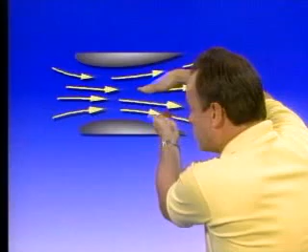And what he learned is if you measure the air pressure as the air goes through the tube, when the air gets to the narrow part, it has to go faster to get through that tube. And at points where the air is going faster through this tube, the pressure is the least. So the points where the air is going the fastest, the pressure is the least. And you might look at this, and it looks like we have two wings here, and we do. So let's take one wing away, and you have the same effect.

You have a wing, and air is forced to go over the top of the wing, and that air speeds up. Now you might say, wait a minute, why doesn't that just compress instead of speeding up? Well, the fact is that free air will not compress. If you could trap it in a gallon jug, you can compress air, but free air won't compress, it just moves out of the way. So this air that gets forced to go over the top of the wing moves faster, and Bernoulli's law says that there is therefore lower pressure at the top of the wing.

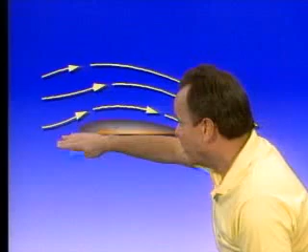And you can measure it with a gauge, measure it any way you want, and there is low pressure on top of the wing, relative high pressure underneath the wing, and that's the pressure differential that creates lift. Now the FAA wants you to know that an aircraft wing is designed to produce lift resulting from, and I'm giving you magic words from the FAA written exam, relative positive air pressure underneath the wing or below the wing surface and negative air pressure over the top of the wing surface, and that's what creates lift, and that's Bernoulli's principle.

Now, let's get a couple other terms out of the way, and one of these terms we want to talk about is angle of attack. And let's start off by drawing a line from the trailing edge of the wing to the leading edge of the wing. If you draw a line from the trailing edge of the wing to the leading edge of the wing, that line is a chord line, and it roughly points the direction the wing is pointed, like so. Now, if the airplane wing is going this direction, the relative wind will be coming from the opposite direction.

And that angle between the chord line of the wing and the relative wind, that angle is called the angle of attack. And the FAA wants you to know the angle of attack of the wing directly controls the distribution of the positive and negative pressure acting on the wing. And when you increase the angle of attack, you increase lift and you also increase drag. So by changing the angle of attack of a wing, you can, as a pilot, control the airplane's lift, airspeed, and drag.

And as you increase this angle of attack, the lift gets greater, you have lower pressure on top of the wing, and higher pressure underneath the wing, and more lift, but at the same time, you have more and more drag as you increase the angle of attack of the wing. So it's by controlling the angle of attack, you can control lift, airspeed, and drag. Now, an increase in angle of attack will increase impact pressure below the wing, and it will also, as a result, increase drag.

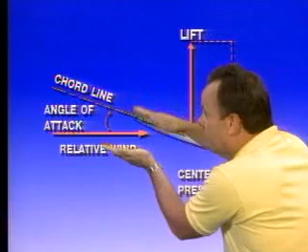Now, to maintain altitude while your airspeed is being decreased, what would you have to do then? Increase or decrease the angle of attack? Well, if you slow this airplane down and you want to maintain altitude, you're going to have to increase the angle of attack to generate more lift. They call that coefficient of lift: increase the lift for a given speed.

So as you slow the airplane down, you have to increase the angle of attack to compensate for the decreasing lift. Now, let's assume you want to transition from straight and level flight to a climb. What do you do? Well, you momentarily increase the angle of attack, and lift will be momentarily increased at the same time as you increase that angle of attack.

Now, as altitude gets higher, the air gets thinner. That thin air affects your pitot tube in exactly the same way it affects the wings. So the airplane will stall and fly at the same indicated airspeed at high altitude as it would at low altitude. But what is your true airspeed over the ground going to be when you're in thinner air? The answer is you're going to actually be going at a faster true airspeed for a given particular angle of attack.

So to generate the same amount of lift as altitude is increased, and I'm giving you the answers for an exact FAA written exam question, an airplane must be flown at a higher true airspeed for any given angle of attack as you go to higher altitude. And that's because to get the same indicated airspeed, you have a higher true airspeed.

Now, when an airplane is flying, the air is flowing smoothly over the surface of the wing and conforming to the surface of the wing. And that's, of course, what creates lift. And as you increase the angle of attack, then you have more lift and you have more drag. You keep increasing the angle of attack, you can get more and more lift until finally you increase the angle of attack to the point where the air can no longer conform to the surface of the wing. And it'll begin to backfill and burble and eddy. And where that is happening, lift is destroyed.

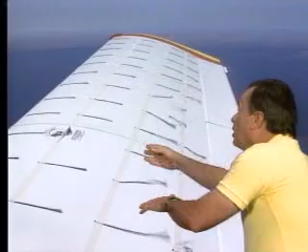And as you increase the angle of attack further, more and more of the wing begins to stall, and lift will be destroyed. And finally, when you reach a critical angle of attack, nearly the entire wing has lost its lift, and that's called the critical angle of attack. And it has to do with the relationship between the chord line of the wing and the relative wind. And that causes the air to flow backwards and backfill and burble like that.

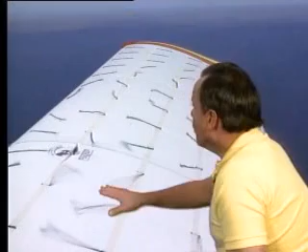Now, the FAA is going to ask you, when does an airplane stall? And the answer is an airplane stalls when you reach the critical angle of attack. And the question is, does the critical angle of attack change? And the answer is no. For any given wing shape, the critical angle of attack remains constant regardless of anything else that's going on. So no matter what they put in this list, the critical angle of attack remains constant because an airplane stalls at a specific angle of attack.

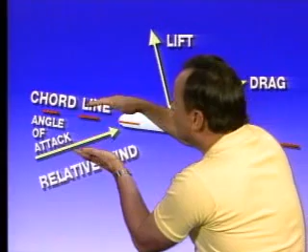So it remains constant regardless of weight, dynamic pressure, that's the air forcing itself over the wing, bank angle, pitch attitude, attitude with relation to the horizon. They could put anything in this list, and the answer is the angle of attack at which an airplane's wing stalls remains constant regardless of anything you might put in that list, because an airplane stalls at the same critical angle of attack at all times. So you can see that this angle of attack, especially the critical angle of attack for a particular wing, rules everything. And then the airplane stalls at a specific critical angle of attack.

Now let me ask you a question. If you have an airplane, we'll say, illegally over gross weight, would that airplane stall at a higher indicated airspeed or lower indicated airspeed? And the answer is it would stall at a higher indicated airspeed because it'll get that critical angle of attack at a higher speed because the airplane is heavy. So let me ask you another question. Is the stalling speed of an airplane a fixed value? And the answer is no.

You'll get that angle of attack at different speeds depending on the weight of the aircraft. So the indicated stalling speed of the airplane is affected by such things as the weight of the aircraft, the load factor, that means the G's you put on the aircraft. You pull out of a dive, everything in the airplane feels like it weighs twice as much, and power, because when you have power off, there's less air over the wings. When you have power on, there's more air over the wings. So those three things will affect the indicated stalling speed of an airplane.

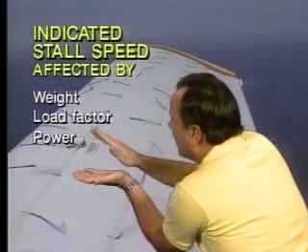So the stalling speed of an airplane is not a fixed value. The stalling angle of attack is a fixed value, and you'll get that angle of attack at different speeds depending on weight, load factor, and power. Now, how about turbulence? If you get in a lot of turbulence, can that cause the aircraft to stall at a different speed? And the answer is, yeah, turbulence can cause an increase in stall speed.

Matter of fact, they're going to ask you two things that turbulence can do for you. One of the things that turbulence can do is cause an increase in stall speed. The other thing turbulence does to you, and it's a completely separate question, is that it requires you to slow an aircraft below maneuvering speed in turbulent weather. So what happens is, when you get in turbulence, you should slow the airplane down to protect the airplane. You should slow it down below maneuvering speed. That's VA. We'll talk more about that later. And you also have an increase in stall speed, so you can see your safe envelope kind of narrows on you. Your stall speed increases, and you need to slow the airplane down to protect the airplane. So in turbulence, your safe envelope kind of narrows down on you.

Now, let's assume that you go out to the airport someday and you notice a little bit of frost on the wings of the aircraft. For instance, here's a case where there might be just a little bit of frost on the wings of the aircraft, and you might notice it. Let's hope you would notice it. Well, anything that interferes with the smooth flow of air over the upper surface of the wing can change the way an airplane flies and could cause it to stall at a higher speed and at a lower angle of attack. So the trick is, if you get out to the airplane and there's even a little tiny bit of frost, you need to take some plastic, preferably not your favorite credit card, and scrape off every bit of ice.

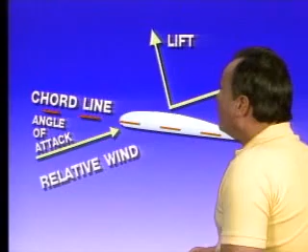Let's take a look at some forces on the aircraft. One of the forces we need to talk about is lift. They're going to ask you, how would you define lift? You can think of a whole bunch of guys sitting around the room saying, hey, I got it. Let's call lift that force produced perpendicular to the relative wind. Here's the relative wind, 90-degree angle, that's lift.

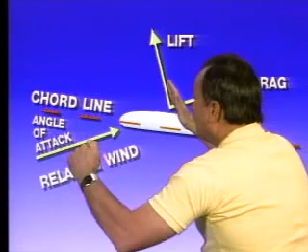You can see it's arbitrary as to how you define lift. The convention is that lift is that force produced perpendicular to the relative wind. Drag, on the other hand, is that force produced parallel to the relative wind and in the same direction. So here is drag parallel to the relative wind, and here is lift perpendicular to the relative wind. Lift also acts perpendicular to the flight path of the aircraft, because that's where the relative wind is coming from, opposite the flight path of the aircraft.

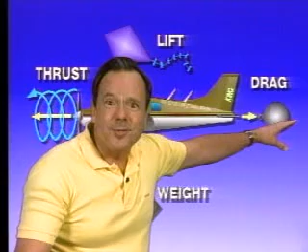Once again, the force of drag acts parallel to the flight path because the relative wind comes opposite the flight path. Now, let's assume that you're flying along in steady state flight. What are the forces on the aircraft then? Well, you have to have some force to propel the airplane along, and that's generally created by the propeller, and that is called thrust. Another force that slows the airplane down over here is called drag. You can think of it as a ball and chain. And then you have the weight of the aircraft, and that is enormously heavy, and then you have lift.

If an airplane is flying along in a straight line at a constant speed, thrust is equal to drag, because if thrust were not equal to drag, the airplane would be changing speed or direction. And lift is equal to weight, because if lift were not equal to weight, the airplane would be changing speed or changing direction. So any time an airplane is in a straight line at a constant speed, the sum of all rearward forces is equal to the sum of all forward forces. Because if they were not equal to each other, the airplane would be changing speed or changing direction. So in steady state flight, the opposing forces, the lift and the weight and the thrust and the drag, are all equal to each other.

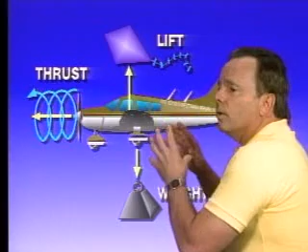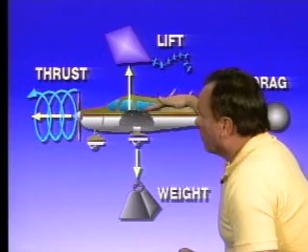But now let's assume you put this airplane into a little descent. During the time that you're changing speed and changing direction, those forces are no longer in balance. But once you have established that airplane in a steady state descent in a straight line at a constant speed, once again, thrust is equal to drag and lift is equal to weight. Because if they were not equal to each other, the airplane would be changing speed or changing direction. So even in a steady state descent, the sum of all rearward forces is equal to the sum of all forward forces.

Now, let's talk about some other things the FAA wants you to know about. The biggest thing you need to know about is more about drag. Here's a chart that talks all about drag. Across the bottom is the velocity of the aircraft, how fast you're going through the air. On the left-hand side is the drag on the aircraft in pounds. There are basically two kinds of drag. One is parasite drag. It's the drag of the skin friction and forcing of the air out of the way. Parasite drag increases as the speed of the aircraft increases. In fact, parasite drag increases with the square of the speed of the aircraft. So as you go faster and faster, parasite drag becomes very, very important.

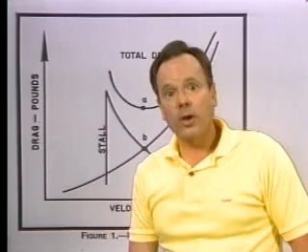Now, the other kind of drag we need to talk about is called induced drag, and that's the drag caused by the angle of attack when you're producing lift. The more angle of attack you have, the more induced drag you have. So that means the slower the airplane goes, the more induced drag you have because the angle of attack is greater. It's a byproduct of producing lift. As you get slower and slower, you have more and more angle of attack and more induced drag. So induced drag decreases as speed increases, and parasite drag increases as speed increases. Now, if you add those two together, you get total drag. Total drag has a shape like this as far as speed is concerned, and here's the way it works.

As you are going slow and you're near stall speed of the aircraft, induced drag is very high, and parasite drag is very small. As you increase the speed of the aircraft, parasite drag becomes more, but induced drag becomes less at a faster rate, until finally, at a certain magic speed or angle of attack of the aircraft, you have minimum drag right there.

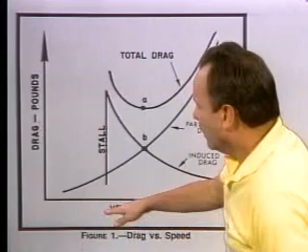And that's the point where you have the least drag and a maximum ratio of lift over drag. Lift is the same. You're keeping the airplane in steady state flight here. You're not losing altitude. So lift is the same. So at the point where the drag is the least on this drag velocity curve, you're going to find that you have maximum ratio of lift over drag, and it's this point right here.

So your induced drag goes down as the speed increases, but parasite drag goes up, and as you get to a certain point where you get faster and faster, now you're over here where parasite drag becomes much, much more.

Now, you've heard of people saying, well, he's on the back side of the power required curve. Well, here's what we're talking about. As an airplane gets slower and slower, it takes more and more thrust to keep the airplane flying. And when it takes more and more power to fly slower and slower, they say you're in the region of reverse command, or it's commonly thought he's flying on the back side of the power required curve.

In fact, in an airplane, we'll say it stalls at 50, full power stall speed, you're going to be at full power, and you're doing all you can to maintain altitude at full power, and that's what you call the region of reverse command. You're on the back side of the power required curve. Okay, so if you want to have maximum range and maximum distance glide, you'd find that at max L over D, the lowest point on the power required curve here, and that's in a propeller-driven airplane.

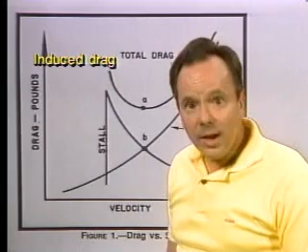Now, as the airspeed decreases below that speed for maximum L over D in level flight, the total drag of an airplane increases because of which kind of drag? And the answer is induced drag. So induced drag is a byproduct of lift and is greatly affected by changes in airspeed. That is induced drag, and that's this one right here. As you get slower and slower, you get more induced drag.

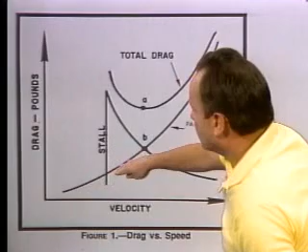Now, if the angle of attack and other factors remain constant and the airspeed is doubled, parasite drag increases by 4 times, because it increases with the square of the speed. So if you double your speed, parasite drag will be 4 times greater. Also, lift acts the same way. Lift will be 4 times as much as you double your speed because it also works with the square of the speed of the aircraft.

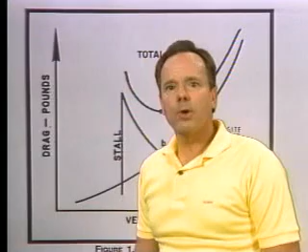Now, let's take a good, close look at Figure 1. And the reason I want to do that is I want to point out points A and B because this is going to be the answer to a question on the test. And the question is, what is the significance of the airspeed represented by points A and B in steady flight? And the answer is, in steady flight, an airplane will have its maximum lift over drag ratio at each of those points and maximum glide range at that airspeed right there. That's maximum L over D.

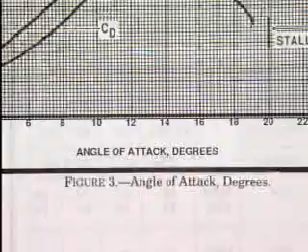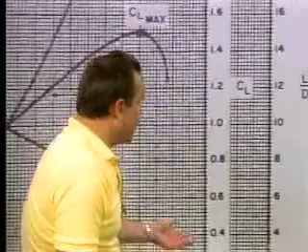Now let's you and I take a look at Figure 3, and we'll talk some more about L over D, or lift over drag ratio. Across the bottom of Figure 3, you see angle of attack. So as you go to the right, angle of attack increases. And on the left-hand side of Figure 3, it says coefficient of drag, so that's a scale that tells you how much drag you have for a given angle of attack. And on the right-hand side, it says coefficient of lift. That's a scale that tells you how much lift you have for a given angle of attack. And on the far right side, there's a scale for lift over drag ratio.

Now, let's take a look at this chart and see if you and I can make some sense out of it. First of all, as the angle of attack increases, you have here a curve that tells you what's going to happen to the lift over drag ratio.

And it starts out as the angle of attack is 0, lift over drag ratio is 0, and as the angle of attack increases, the lift over drag ratio increases, meaning you have more lift with less drag, until finally you get L over D max. Let's stop right there and talk about max L over D for a second. We talked about it earlier, it's the point where your drag is at the minimum, and notice that you get max L over D at a specific angle of attack.

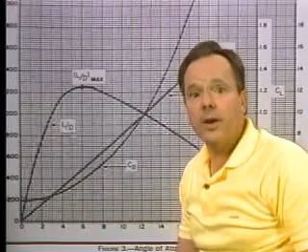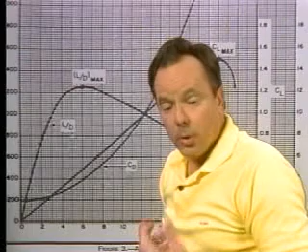And that's a very important thing, because max L over D is where you have maximum range airspeed. And what they want you to know is you get that maximum range airspeed at a specific angle of attack. And as the weight decreases, you decrease the speed for maximum range airspeed, because maximum range occurs at a specific angle of attack. So when you have less weight on the aircraft, you'll get that specific angle of attack at a lower weight or lower speed, and when you have more weight on the aircraft, you'll get the specific angle of attack at a greater speed. So maximum range airspeed actually decreases when weight decreases, because it occurs at a specific angle of attack.

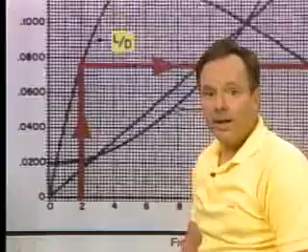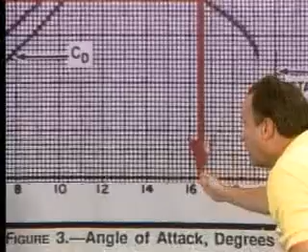Now let's you and I take a look in the lower left-hand corner here of figure 3, and let's take a look at 2 degrees angle of attack here, and let's read up from 2 degrees angle of attack until you hit the L over D line. Now the question they're going to ask you is, the L over D at 2 degrees angle of attack is equal to the same L over D as what other angle of attack? And you'll go across and read it parallel from the 2 degree angle of attack where it hits the L over D line, and read right straight down again when you hit the L over D line again, and you find out that the 2 degree angle of attack is equal to the same L over D as you'd get at 16.5 degrees angle of attack. What's the purpose of that? I don't know. They just want to know if you can read this particular chart.

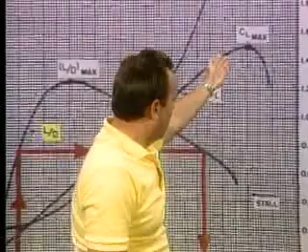Now, another thing you need to know is there's a lot of other curves on here. What do they have to do with? Well, here's a line that tells you what the coefficient of drag is for a given angle of attack, and the coefficient of drag will increase as the angle of attack increases. Another line here will tell you what happens to lift as you increase the angle of attack. So here's the coefficient of lift, and of course that's the stalling coefficient of lift up here. When you get to the particular angle of attack where it stalls, it begins to drop off very rapidly. So that's what the other lines are. The only line they ask you about, however, is the L over D line.

For instance, they're going to say if an airplane glides at an angle of attack of 10 degrees, how much altitude would it lose in a mile? Well, let's look at the 10 degree angle of attack here, and there's the 10 degrees. You go up to the L over D, and read all the way across the far right-hand side and see what the lift over drag ratio is, and you see the lift over drag ratio would be about 11. So if the lift over drag ratio is 11, that tells you the airplane will go 11 feet forward for each foot that it goes down. So now let's find out how much altitude it will lose in a mile over the ground. The lift over drag ratio was 11, so it's 5,280 feet divided by the lift over drag ratio. 5,280 feet divided by 11, that means that the airplane will go a mile forward while it only loses 480 feet, and that's what the lift over drag ratio of 11 means. And so it would lose 480 feet in 1 mile forward.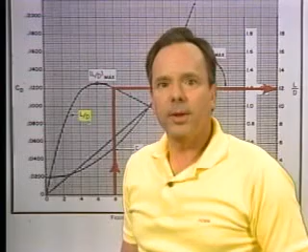Let's do another one. They're going to say how much altitude will this airplane lose in 3 miles of gliding at an angle of attack of 8 degrees. Well, let's find out what the L over D is at 8 degrees. So you go down here at 8 degrees, you go up until you hit the L over D line, stop and make a dot, then read over in the far right-hand side, and at 8 degrees you find out the lift over drag ratio happens to be about 12.

Well, it's 12 exactly according to this chart. So let's figure out the formula and see how much altitude you're going to lose in this particular case in 3 miles of gliding. Well, the distance is 3 times 5,280 feet. The L over D is 12. Divide that by 12. In 3 miles of going forward, you will lose 1,320 feet.

It's 3 times 5,280 feet per mile. You need to know, by the way, it's 5,280 feet per mile. So 3 times that divided by 12. And in gliding 3 miles forward, it'll only go down 1,320 feet.

Okay, now let's take a look at an airplane and talk about one other type of force on the airplane. We've covered drag real well, but here's an airplane flying along. Isn't that a gorgeous shot of an airplane flying along? And notice the propeller is turning clockwise. And when this propeller turns clockwise, it tends to swirl the air clockwise around the aircraft like that.

Now, as the air swirls around the airplane, you can see what happens is the air will hit the tail on the left-hand side. And that air hitting the tail on the left-hand side does two things. First of all, it makes the tail want to go to the right. In other words, it'll try to yaw the whole airplane around like that. So the airplane will yaw about the vertical axis. The vertical axis is a line drawn from the floor to the ceiling of the aircraft right straight up.

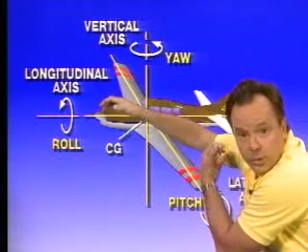Let's take a look at these axes of an aircraft right here, and let's see if you and I can make some sense out of them. First of all, if you draw a line from the nose of the aircraft to the tail of the aircraft, that is called the longitudinal axis of the aircraft, and the aircraft rolls about that longitudinal axis. If you have a line going from, and that line, by the way, has to pass through the center of gravity of the aircraft. And if you have a line going from the floor of the aircraft to the ceiling of the aircraft, and that line passes through the center of gravity, that is the vertical axis of the airplane, and the airplane yaws about the vertical axis.

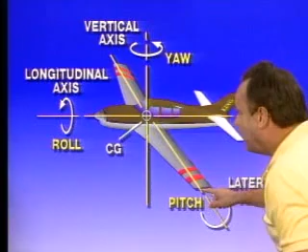And if you have a line drawn from wingtip to wingtip, and it passes through the center of gravity, the airplane will pitch about that line, and that line is called the lateral axis. The airplane pitches about the lateral axis. Now, all of these axes intersect at the center of gravity, and all rotations of an aircraft take place around the center of gravity. Now, let's see what that means to us.

Well, one of the things it means to us is how the airplane is going to behave in flight, and let's talk about various kinds of stability. And let's talk about what makes an airplane stable versus unstable in the air. First of all, when an airplane is flying along, you normally will have a slight aerodynamic downforce on the tail. In most general aviation airplanes, that always surprises people, but the tail's actually trying to fly down. And the reason there's an aerodynamic downforce in the tail, that downforce helps make the airplane stable as far as pitch and speed are concerned.

Now let's talk about it. First of all, see where the center of lift is on this airplane. Now technically, they don't call that the center of lift, they call that the center of pressure. But we'll call it the center of lift for right now. But pick this airplane up by a string where the center of lift is. Notice where the center of gravity is.

If you pick this airplane up by a string where the center of lift is, the center of gravity is in front of it, so the airplane's going to want to pitch down. In order to keep from pitching down, there's an aerodynamic downforce in the tail, and that keeps the airplane from pitching down when it's flying. And the airplane is designed so that it's flown exactly that way, and here's why.

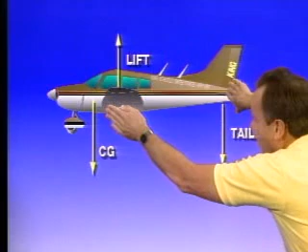Look what happens now if this airplane's nose gets down, the airplane picks up speed and starts going too fast. Now there's more air over the tail and more downforce on the tail, and with increased speed, the airplane's nose will come back up, the airplane will climb, lose speed, and return to its original speed. This aerodynamic downforce on the tail helps make the airplane stable as far as pitch and speed are concerned.

You say, well, what if the airplane gets too slow? Well, if the airplane gets too slow, there's less air over the tail, the tail will come up, the airplane will dive, pick up speed, and return to its original speed. So that aerodynamic downforce on the tail helps make the airplane more stable as far as pitch and speed are concerned. And by the way, the further forward the center of gravity is, the more downforce there is on the tail, and therefore the more stable the airplane is.

So you can change the stability of the aircraft by changing the loading of the aircraft, by changing the relationship of the center of gravity to the center of lift. Can you move the center of lift in an airplane? Not without a hacksaw. But can you move the center of gravity? Sure, just put bags or bricks in a baggage compartment back here. So you can move the center of gravity around, and you can change the stability of the aircraft by where you load the load inside the aircraft.

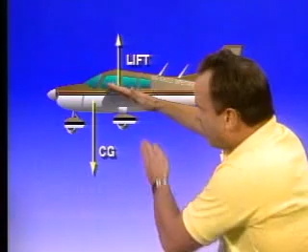Now, longitudinal stability is that kind of stability about the lateral axis. So longitudinal stability is motion about the lateral axis, that's pitching up and pitching down. That's called longitudinal stability. Now, there are two types of longitudinal stability, static and dynamic, and let's you and I illustrate how they work. First of all, we have static stability. If you press forward on the wheel and let go.

Now, I don't know why anybody would want to do that, but if you press forward on the wheel and let go, the nose will go down, and if the nose comes back towards equilibrium, the airplane has what is known as positive static stability. The nose returns to its original position after the elevator control is pressed forward and released. Now, if you press forward on the wheel and let go and the nose just stays down, that would be neutral longitudinal static stability. The nose remains in the new position after the elevator control is pressed forward and released. And if the airplane gets worse and worse and worse, that would be negative static stability.

Now, let's talk about dynamic stability. We all know that if you press on the wheel and let go, the nose just doesn't come back to equilibrium and stop. You have oscillations. And if the oscillations get smaller and smaller and smaller, you have positive dynamic stability. If, on the other hand, the oscillations get bigger and bigger and bigger, you have longitudinal dynamic instability. Longitudinal dynamic instability can be identified by pitch oscillations that become progressively steeper. It gets worse and worse and worse.

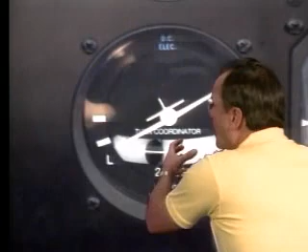So let's assume you look at the turn coordinator and you're looking at that ball. What you're going to find is the ball will be off to one side. In fact, if the instrument is installed on the left-hand side of the aircraft, the ball will be to the left, generally slung all the way to the left-hand side. Now, they don't call this the ball on the FAA written exam. They call that the inclinometer. So if the inclinometer is on the left side of the panel, a spin to the left would displace the ball to the left. A spin to the right would also. It just depends on where it's mounted inside the aircraft.

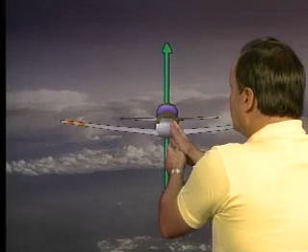Now, let's take a look at an airplane and let you and I turn that airplane. The FAA is going to ask you what's going on inside an airplane, or as far as an airplane is concerned aerodynamically, when it's turning. Well, a lot's going on when the airplane's turning. Isn't that pretty? I like that a lot. A lot's going on when the airplane's turning. So let's have an airplane fly straight and level first, and then let's take a look at what happens to the airplane when it turns. When an airplane is flying straight and level, lift, which you can think of as being through the ceiling of the aircraft, is all vertical. And, of course, the wings have to support the weight of the aircraft, which is right straight down.

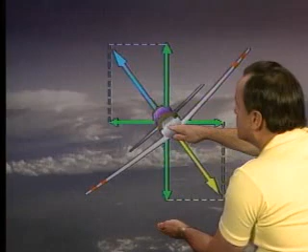Now, let's you and I bank this airplane for a turn. And when we bank the airplane for the turn, we tilt that lift. And that lift, which was vertical, is now out through an angle like this. And now there is both a vertical component of lift and a horizontal component of lift. And it's that horizontal component of lift that makes the airplane turn. At the same time, the wings not only have to support the weight of the aircraft, but they also have to support centrifugal force. So the whole airplane acts as if it weighs more, and that's called load factor. When the wings have to support more weight than the airplane actually weighs, that's called load factor, and centrifugal force is causing load factor on the aircraft at this particular time.

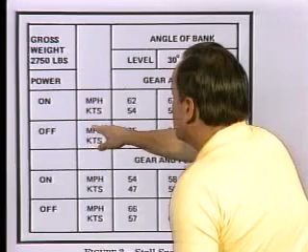Now, when you roll the airplane into a bank then, effectively, the airplane gets heavier, and that increases the stalling speed of the aircraft. So banking an airplane for a turn increases the stalling speed. How much? Let's take a look at figure 2 here, and you see we have an airplane here, power on, and let's take a look at the stalling speed in knots. Let's start with the gear and flaps up. You have this airplane in a 30-degree bank, power on, gear and flaps up. The stalling speed in level flight is 54, 30-degree bank, 58, 45-degree bank, 64. And finally, when you roll this airplane into a 60-degree bank, you can see the stalling speed is increased up here to 76. So when you roll the airplane into a bank, it does increase the stalling speed of the airplane.

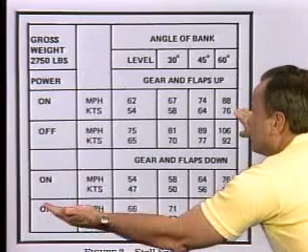Now, do power on stalls occur at lower airspeed in shallower banks or steeper banks? Well, lower airspeeds in shallower banks, higher airspeeds in steeper banks. Okay, now, how many knots higher will the airplane stall in a 60-degree bank with the gear and flaps up than with the gear and flaps down? Well, we already took a look at the gear and flaps up. In knots, the stalling speed, gear and flaps up, 60-degree bank is 76. Put the gear and flaps down, in knots, the stalling speed is 66. So they're going to ask you this on the test, and all you have to do is look at figure 2 to figure it out, and the answer is 10 knots.

So as the bank angle is increased in an airplane, the airplane gets effectively heavier, and there's more load factor on the aircraft. So let's take a look at all the things that happen as you increase this bank angle. First of all, the vertical component of lift would get less because you're tilting the lift unless you have back pressure on the wheel to increase the angle of attack, to increase the vertical component of lift. And the horizontal component of lift, of course, increases when you bank the airplane.

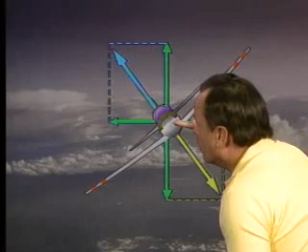So as you bank the airplane, you're tilting the lift, and unless you have back pressure, the vertical component of lift will get less, and of course the horizontal component of lift increases. So if you're banking an airplane for a turn, and you'd like to maintain altitude during that turn, what you have to do is increase the angle of attack with increased back pressure to compensate for the loss of the vertical component of lift when you bank the airplane for a turn.

As you can see, there is a lot going on when an airplane turns. Now the FAA will go even further and ask you more questions about this. They're going to say, what determines the rate and radius of turn of an airplane? Well, there's two things that determine the rate and radius of turn. One is the angle of bank, and the other is the airspeed of the aircraft.

In a coordinated turn at a constant altitude for a specific angle of bank and for a specific airspeed, you're going to get a specific rate and radius of turn. It will not vary. It will stay the same if you have a given bank angle and a given airspeed. But for any given bank angle, the faster the speed of the airplane, the greater the turn radius, and the slower the rate of turn.

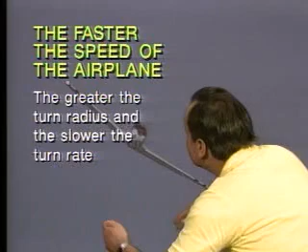Now, you can help yourself think of that. Think of a car on ice, and it's a real icy parking lot here, and you're trying to turn around. Well, the faster that car is going, the slower the rate of turn, and the larger the radius of turn of that car. So let's assume you want to increase the rate of turn, and let's assume at the same time you'd like to decrease the radius of turn.

What would be the best thing you could possibly do? Well, if you want to increase the rate and decrease the radius, you steepen the bank and decrease the airspeed. Both of those things will work in your favor. So to increase the rate of turn and decrease the radius, steepen the bank, and decrease the airspeed. By the way, you could also maintain the bank and decrease the airspeed, and that would increase the rate of turn, but it's not as efficient as doing both of these things.

Now, let's assume you want to maintain altitude as you increase the airspeed during a turn. Well, anytime you increase the airspeed of the airplane, and you're in a turn, you're going to have more lift on the wings. So if you want to maintain altitude while increasing the airspeed in a turn, what could you do? Now, what this question boils down to is if you're in a turn and you feel the airplane climbing, what would be a good way to keep the airplane from climbing? And the answer is steepen the angle of bank. If you steepen the angle of bank, you decrease the vertical component of lift.

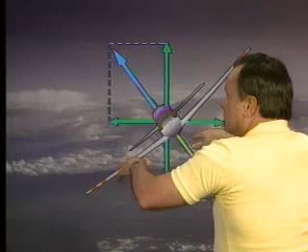Conversely, if you're in a turn and you feel yourself losing altitude, one of the things you could do is roll out of the bank. So the answer on the FAA written exam is to maintain altitude. If your airspeed is increased during a level turn, what you must do is increase the angle of bank, or you would have to decrease the angle of attack. You could ease off on the back pressure on the wheel.

Now let's talk about load factor on an airplane. The load factor occurs when you roll an airplane into a steep bank, put a lot of G's on it, or pull out of a dive. That'll put a little load factor on an airplane, or fly in turbulence. So if an airplane, for instance, flies along, the airplane really weighs 2,000 pounds, but it feels like it weighs 4,000 pounds, the airplane would have a load factor on it.

So load factor is the total air load imposed on the wings divided by the total weight of the aircraft, and load factor directly affects the stalling speed of the aircraft. It is as if that airplane got heavier all of a sudden. To find out how much heavier that airplane gets when you roll it into a steep bank, let's you and I take a look at Figure 4.

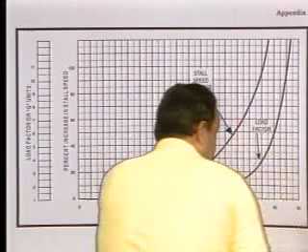Now, across the bottom of Figure 4 is the bank angle. It goes 0, 10, 20, 30, 40, 50, 60 degrees all across the bottom here. And on the left-hand side is the percent increase in stall speed. And the far left-hand side is the load factor. That's the number of G's you're putting on the airplane.

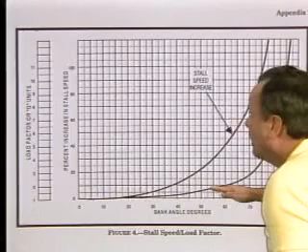Now, if you look at this chart, you'll notice there are two lines here. This line is for stall speed increase, and this line is load factor. So if you start down at the bottom at a 60-degree bank and go up to the second line, that's your stall speed increase, and find out where that line hits the 60-degree bank, read across, you'd find your percent increase in stall speed is about 40%. And that same 60-degree bank, you go up to the first line, which is the load factor line, read all the way across to the left, and you'd find out you have 2 G's on the airplane.

So the FAA is going to ask you a question about this. They're going to say, let's assume that you have a 2,000-pound airplane, and you roll that airplane into a constant altitude 60-degree bank. First of all, what's the load factor on the airplane? And the answer is that you would have a load factor of 2. So if the airplane originally weighed 2,000 pounds and you have a load factor of 2, to find the total load, you take the load factor times the weight, and the total load the wings of that airplane would have to support would be 4,000 pounds.

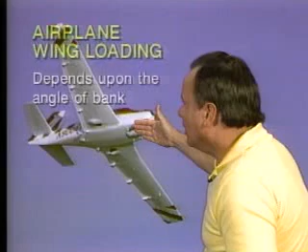So you can see that there is wing loading on an airplane when you roll the airplane in even a level coordinated turn in smooth air. And the amount of wing loading depends on the angle of bank. So what does the airplane wing loading depend on? It depends on the angle of bank that you're putting in the airplane. Now, for a given angle of bank, the load factor remains constant. But as you do increase the angle of bank, the stall speed increases and the load factor increases as you roll it into the bank. But for a given angle of bank, you have a given load factor.

Now, if the airspeed while you're in that bank is increased at a constant bank angle, the load factor remains constant, regardless of the air density and the resultant lift vector. What would happen then if you're in a specific bank angle and you speed the airplane up, the radius of turn will increase and the rate of turn will decrease. So for a given angle of bank, the load factor remains constant, but when you change the speed of the airplane, you change the radius of turn and you change the rate of turn.

Now let's take a look at an example of that. Let's assume that you have an airplane in a bank. We'll say a level 60-degree bank turn. By the way, how many G's are on an airplane in a 60-degree turn? You got it, 2 G's. And let's assume you keep this airplane in a 60-degree bank turn and you increase the speed from 90 knots to 135 knots. What's going to happen to the load factor when you increase the speed of the airplane? And the answer is the load factor will stay the same, but the radius of turn will increase.

Now, most small airplanes, all normal category airplanes, are designed so that the maximum positive load factor you can put on the airplane is what? 3.8 G's. So the load factor for normal category airplanes is 3.8 G's. Now, here's a question. Let's assume that you put baggage in an airplane that weighs 90 pounds, and it's a normal category airplane. You know that's a 3.8 G airplane. And let's assume the baggage compartment is placarded that it has a maximum weight of 100 pounds.

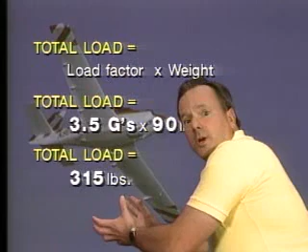Now, let's assume you roll this airplane into a bank and get 3.5 G's on the airplane, or some other way, fly in turbulence or pull out of a dive. Somehow you get 3.5 G's on the airplane. The question is, would the total load of the baggage be excessive as far as the baggage compartment was concerned? Well, let's figure it out. First of all, total load is the load factor times the weight. And the baggage weighs 90 pounds. The total load is 3.5 G's times 90 pounds. So that baggage sitting in that baggage compartment of that airplane would feel to the airplane as if it weighed 315 pounds. Now, the baggage compartment is placarded for a maximum weight of 100 pounds. Let me ask you a question.

Did you exceed the capacity of that baggage compartment? And the answer is no. Because when they built that baggage compartment, they built it to take a load of 3.8 Gs with 100 pounds in it. So that baggage compartment was actually built to take more than that 315 pounds, and that's why there is a limit on the amount of baggage you can put in a baggage compartment. So it would not be excessive.

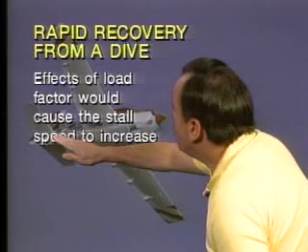Now, let's assume you pull out of a steep dive and you do put some load factor on an airplane. Well, in a rapid recovery from a dive, the effects of load factor would increase the stall speed of the aircraft. So the stall speed would increase. If you bank the airplane for a turn, would that increase or decrease the stall speed of the airplane? Of course, banking an airplane for a turn increases the load factor and increases the stalling speed of the airplane.

Now, let's take a look at Figure 4, and let's take a look at a couple questions they're going to ask you about this. First of all, they're going to give you an airplane. You don't even have to win a sweepstakes. They're just going to give you an airplane, and they're going to say that that airplane has a stalling speed of 60 knots. And they're going to have you roll that airplane into a turn such that you have a 2G load factor on the airplane. Now, what's the stalling speed of the aircraft?

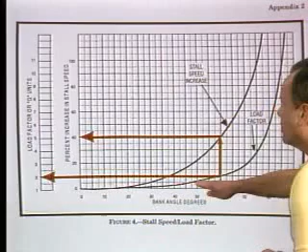Well, you have to figure out where 2Gs occurs. Here's 2Gs over here. You read across here until you get the load factor line. Read right straight down. You find out 2Gs occurs at 60 degrees bank. So you start at 60 degree bank now and go up to the percent increase in stall speed line and transfer off over here and read the percent increase in stall speed, and you've got a 40% increase in stall speed. Now remember, when they gave you this airplane, they told you this airplane stalled at 60 knots. So you take that 60 knots and multiply it times 140% because you had a 40% increase in stall speed. So that's the same as multiplying it times 1.4. And now your stall speed is 84 knots. So they simply want you to know when you roll the airplane into a steep bank, put a couple Gs on the airplane, you do increase the stalling speed of the airplane.

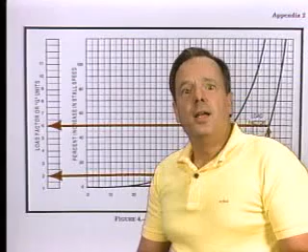Now let's take a look at another question they're going to ask you on Figure 4. They're going to say what increase in load factor would take place if the angle of bank were increased from 60 degrees to 80 degrees. Now, 80 degrees is a steep angle of bank. Well, we can take a look at the 60-degree bank, and we find here's the load factor line. We read across to the left, and we have 2 Gs on the airplane. Put this airplane in an 80-degree bank, go up to the load factor line, read across to the left, and now, in an 80-degree bank, you have 6 Gs on the airplane.

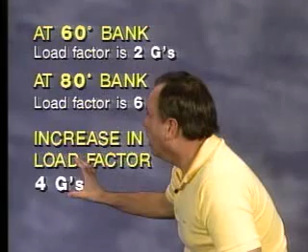So how many Gs did your load factor increase? And the answer is you had 2 Gs, now it went to 6 Gs. You had an increase in load factor of 4 Gs. Now make sure you know what they're asking. They ask you for the increase in load factor, and it's 4 Gs, and you can see that rolling an airplane into steep banks puts a lot of load factor on the airplane.

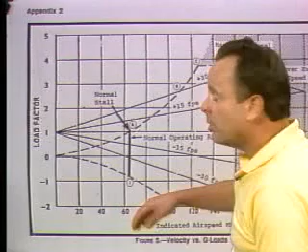Now you've heard pilots talk about flying an airplane within the envelope. Well, here's the envelope they're talking about right here on Figure 5. And this chart is basically a graphical representation of the Federal Aviation Regulations that tell a manufacturer how strong he has to build an aircraft. Let's take a look at it and see if we can make some sense out of it.

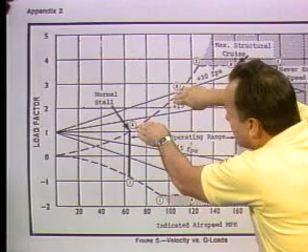Across the bottom is the speeds of the aircraft. On the left-hand side is the load factor on the aircraft. And what we're going to find is that the normal stall speed of this airplane under 1G is about 62 or 63. But as you put load factor on the aircraft, the stalling speed of the aircraft increases like so until you get the maximum load factor the airplane's built to take, which is 3.8 Gs. You read right down from that point, and that's when the airplane stalls at 3.8 Gs, and that's 120 or 123 for this particular airplane, and that is the maneuver speed for the airplane.

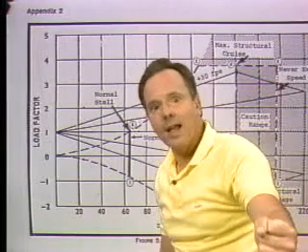And that is the maximum speed at which you can make an abrupt and complete deflection of the controls without causing structural damage to the aircraft. In other words, you can be flying along at maneuver speed, reach forward, grab the wheel, and jerk it back in your lap as hard as you want, and not cause structural damage to the aircraft because the aircraft will stall before the wings become damaged. Scare the daylights out of everybody on board, but you won't cause structural damage to the aircraft.

Now, if you roll this airplane upside down on its back, it's going to have an upside down stalling speed. And here is the curve right here that tells you the upside down stalling speed of the aircraft with Gs until you get the maximum speed you can safely fly the airplane, or maximum number of Gs you can safely put on the airplane upside down. And that's a negative load factor that's allowable for this airplane. So you have to fly the airplane within 3.8 Gs positive and this negative load factor, or else you might cause structural damage to the aircraft.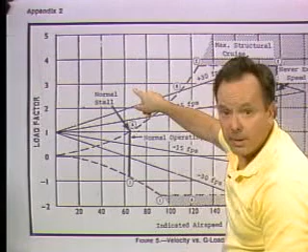And if you fly, for instance, at 80 knots and put 3 Gs on the airplane, what's going to happen? It's going to stall. But if you fly the airplane at 140 knots and put 3 Gs on the airplane, it'll just fly with it, no problem at all. Well, let's do another one. Let's assume you put about 4.5 Gs on the airplane at 80 knots. What's going to happen? It's on the left-hand side. It's going to stall. But if you put 4.5 Gs on this airplane over here at about 160 knots, what's going to happen? Structural damage to the aircraft.

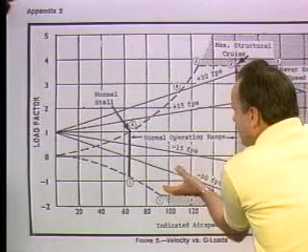So that's what this is all about. You got to fly the airplane inside this envelope. You get over here, you're going to stall. Up here, you're going to have structural damage to the aircraft. Now, another thing you need to look at is here is a line that tells you what a 30 foot per second gust load factor does to the aircraft. If you got hit by a 30 foot per second gust load factor, we'll say at 80 knots, the airplane's going to stall. In here, it's going to fly, and here you have maximum structural cruising speed.

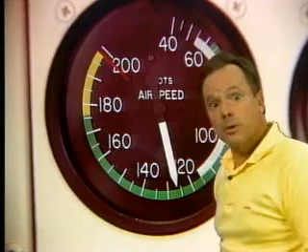Now, if you remember, maximum structural cruising speed is the top of the green arc and the bottom of the yellow arc on the airspeed indicator. Now, what is the significance of maximum structural cruising speed? Well, maximum structural cruising speed is the speed above which anything more than light turbulence could cause structural damage to the aircraft. And the regulations say that at maximum structural cruising speed, a 30 foot per second gust load factor can't put any more than 3.8 Gs in the airplane. In this particular airplane, it puts a little bit less on the airplane. So that's maximum structural cruising speed.

Anything above maximum structural cruising speed is shown by the yellow arc on the airspeed indicator. And then you have the red line, which is never exceed speed. And then finally over here is design dive speed. Well, you're not allowed to fly any faster than never exceed speed.

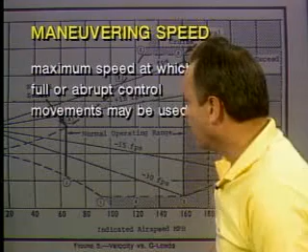All right, let's take a look at the questions they're going to ask you about this on the test. First of all, they're going to say what's color-coded and what's not color-coded on your airspeed indicator. Is maneuvering speed color-coded on your airspeed indicator? And the answer is maneuvering speed is not color-coded on your airspeed indicator. And how about maximum landing gear extended speed? No, that is not color-coded on the airspeed indicator. Now, maneuvering speed is, as we said earlier, the maximum speed at which you can make full or abrupt control movements without causing structural damage to the aircraft, but it is not shown on the airspeed indicator. It's placarded on the panel.

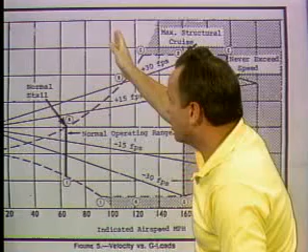Now, let's assume you're flying along in an airplane and you get into severe turbulence. What would you like to do? You'd like to reduce the airspeed to below maneuver speed, because if you get the airplane to maneuver speed or below, no amount of turbulence will cause structural damage to the aircraft, because the airplane will stall first. So you want to get the airplane down here so that if you hit severe turbulence, it's going to stall rather than having structural damage, which you would have over here. So if you're entering an area where you expect significant clear air turbulence, what you do is adjust the airspeed to that recommended for rough air, and in little airplanes that is maneuver speed or below.

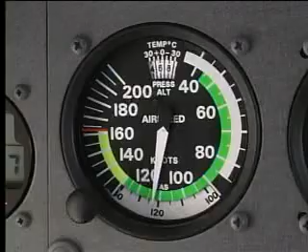Now, once again, what's the significance of maximum structural cruising speed? Well, it's the maximum speed at which an airplane can be operated during normal maneuvers, and anything more than light turbulence could cause structural damage if you're above that speed. Now, you can never exceed never exceed speed. Never exceed speed is called VNE, and I'll find it over here. Here's never exceed speed, called V sub NE. And it should never be flown at that speed or above that speed, because design limit load factors may be exceeded if you encounter a gust, and that is the red radial line on your airspeed indicator.

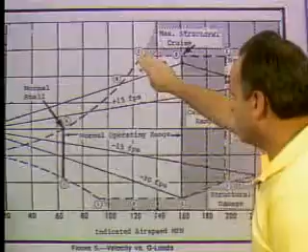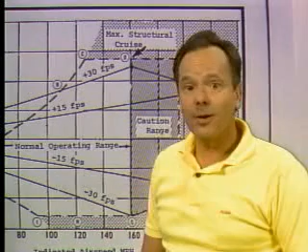They're going to ask you some questions about figure 5 here on the test. They're going to say, what does the horizontal dashed line from C to E represent? Well, here's C and here's E. What's this line represent? And the answer is the positive limit load factor. 3.8 Gs is the positive limit load factor. What's the vertical line from point D to point G represent? Well, point D to point G is this line that goes right here like so. And that is the maximum limit of the green arc on the airspeed indicator, and that's maximum structural cruising speed right there. What's the vertical line from E to F represent? They're going to ask you on the test, and that's red line or never exceed speed, and that's E to F like so. So that line from E to F on figure 5 on an airspeed indicator represents the top of the yellow arc and red line.

By the way, the bottom of the yellow arc, one more time, is maximum structural cruising speed. And once again, the most important speed to fly in turbulence, maneuver speed, is not shown on the airspeed indicator. So if you do get in severe turbulence, what you want to do is aim for maneuver speed. But the way you do it, and this is an FAA test question, is set up a power setting and a trim that you know will get your maneuver speed or slightly below, and then maintain wings level attitude and accept variations in airspeed and altitude.

Because 9 times out of 10, when an airplane comes apart in turbulence, it's the pilot that tears the airplane apart, not the turbulence, because the pilot has the nose get down, starts to lose altitude, and jerks back on the wheel and tears the wings off the airplane. So set a power setting and a trim that you know will get your maneuver speed or slightly below, and then maintain wings level and accept variations of airspeed and altitude.

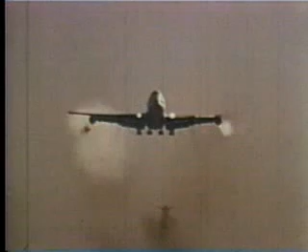Now, if up till now you have not believed in wingtip vortices, take a gander at this. Isn't that something? This is a Boeing 747 with smoke generators on it, demonstrating wingtip vortices. And that's the principal cause of hazardous wake turbulence behind a large aircraft, is these wingtip vortices. Boy, these can roll you on your back, and on short final, that can ruin your whole doggone day. So how do they work? Well, anytime an airplane is flying, you have relative high pressure underneath the wing, relative low pressure on top of the wing. It's that pressure differential that creates lift, and that's what makes an airplane fly.

Well, anytime you have a high pressure area next to a low pressure area, the molecules from the high pressure area are going to try and make their way around the wingtip and slam themselves down on the wing to join the molecules in the low pressure area. The problem is, by the time these molecules make their way around the wingtip, the top of the wing is gone. It isn't there anymore, and you really get these little wake turbulence or wingtip vortices, and they're very much like tornadoes, and they can just be terrible for a little airplane flying in this. Now, this wake turbulence is greatest when the pressure differential at the wingtips is greatest. And the pressure differential at the wingtips is greatest when the angle of attack at the wingtip is greatest.

So let's talk about when the angle of attack at the wingtip of the airplane will be the greatest. First of all, would it be when it's heavy or light? Well, it's when the airplane's heavy, because you have to have a bigger angle of attack when the airplane is heavy. How about when you're flying fast or slow? Well, when you're flying slow, you have a bigger angle of attack, so slow would be the case. Now, how about when the airplane is clean or dirty, that is, flaps up or flaps down? Well, when the airplane is flaps up, to get the same lift at the same speed, you have to have a bigger angle of attack at the wingtips. So wake turbulence is greatest and the vortex strength is greatest when the airplane is heavy, clean, and slow.

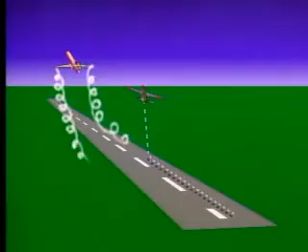Now, these vortices occur any time there's lift on the wings, so when an airplane rotates for takeoff, now there's lift on his wings, and these vortices begin when he rotates. Now, as the airplane climbs out, or anytime the airplane is flying, the vortices descend behind the aircraft. When they hit the ground, they diverge or move apart from each other, and they drift with the wind.

So a light quartering tailwind can hold the upwind vortex right over a runway, while the downwind vortex will drift further downwind. So a light quartering tailwind can hold this vortex right over the runway, and that makes the problem with wake turbulence a lot worse.

So if you're taking off behind a big aircraft, what you want to do is be airborne prior to reaching the point where the jet rotated. Then you want to climb above his flight path and then stay upwind of the jet's flight path if you can until you're able to turn clear of its wake. So try and get airborne before he does. Outclimb him if you can. If you can't, in a Cessna 150, you'll play heck out climbing a 727, but turn and go upwind.

Now, let's assume you're getting ready to take off in an airport and a big jet comes in and lands in front of you like this. Well, you don't want to fly through his wake turbulence, and he has wake turbulence until his nose wheel touches the ground. And what you want to do is keep track of the point where his nose wheel touched the ground, and then you want to stay on the ground during your takeoff later until you're beyond the point where his nose wheel touches the ground, and then you won't be in his wake turbulence.

Now, let's assume you're landing behind a large jet aircraft. What do you want to do? Well, remember, his vortices descend behind him. And so what you want to do is, once again, notice where his nose wheel touched the ground and land beyond the jet's touchdown point, particularly where his nose wheel has touched the ground.

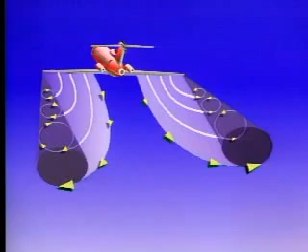Now, let's assume that you're on a cross country and a big, large jet like this crosses in front of you. The FAA is going to say from left to right, approximately 1 mile ahead, at your altitude. What should you do to avoid wake turbulence? And the answer is you should make sure you are slightly above the jet's flight path.

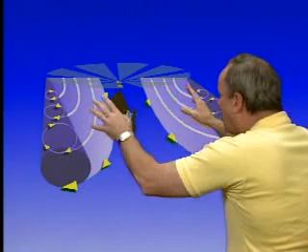Now, let's assume today, instead of flying in the vicinity of a big iron airplane, holy mackerel, you're flying in the vicinity of a big iron helicopter, just like this. Well, do you have to worry about wake turbulence behind a helicopter? And the answer is yes, you do. You have vortex circulation behind a helicopter just like you do behind an airplane, and it trails behind a helicopter in forward flight just like it does with wingtip vortices generated by an airplane.

Now let's take a look at one other thing very similar to wake turbulence, and that is ground effect. Anytime an airplane is flying, there is high pressure underneath the wings, low pressure on top of the wings, and some of that air is going around destroying lift on top of the wings. But when an airplane's within about a wingspan or less of the ground, the ground interferes with the ability to get around the wing and destroy some of the lift on top of the wings.

So when you're in ground effect, about a wingspan or less of the ground, some of the lift that would have been destroyed is no longer being destroyed, and the airplane actually flies a little bit better in ground effect. So ground effect increases lift, reduces drag, and lowers your stalling speed. So an airplane leaving ground effect will experience an increase in induced drag and require more thrust, because when you leave ground effect, you no longer have the help that you do when you're within about a wingspan of the ground.

Now, if you keep the same angle of attack in ground effect as when out of ground effect, what's going to happen is lift will increase when you get back in ground effect for landing, and induced drag will decrease as you're coming in for landing. So to produce the same lift while out of ground effect as when in ground effect, you'd have to increase the angle of attack. And when you get back in ground effect, you'd lower the angle of attack.